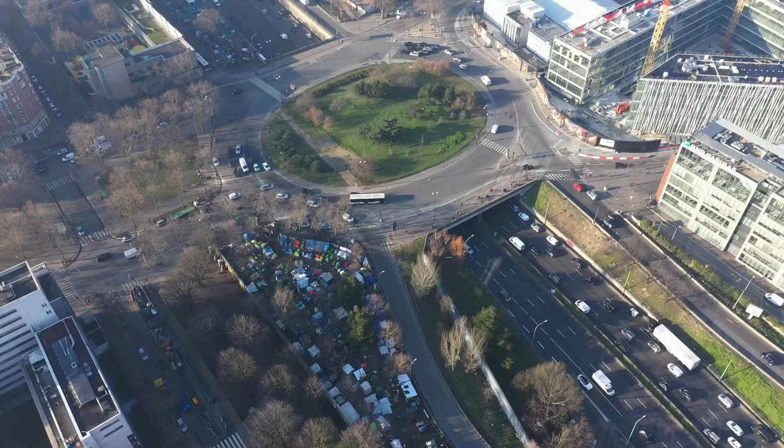Last video, we talked about the different types of greenhouse gases and their common sources, as well as how they contribute to global warming and climate change. In this video, we're going to delve deeper into the water sector's role, which we touched upon briefly last time.

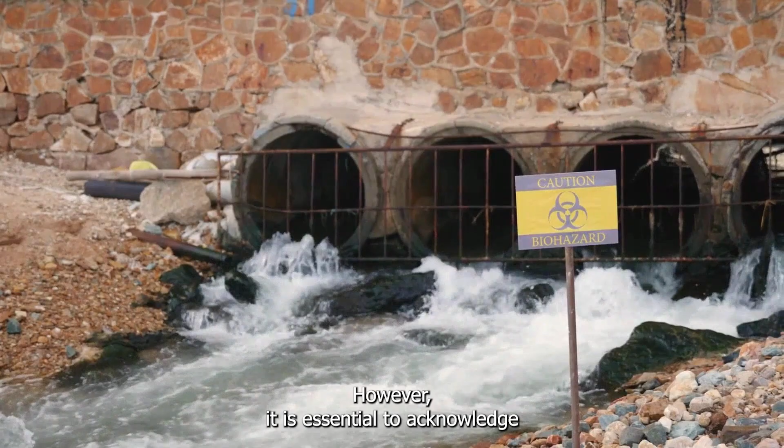The significance of the water sector's contributions to global warming can sometimes be underestimated. It tends to be lumped together with other industries, leading to misrepresentation, such as associating wastewater treatment plants with landfill emissions. However, it is essential to acknowledge that water-related processes, especially wastewater treatment facilities, constitute a distinct and noteworthy source of greenhouse gas emissions. In this discussion, we will begin by addressing the water sector in its entirety, but our subsequent focus will be primarily on wastewater treatment facilities.

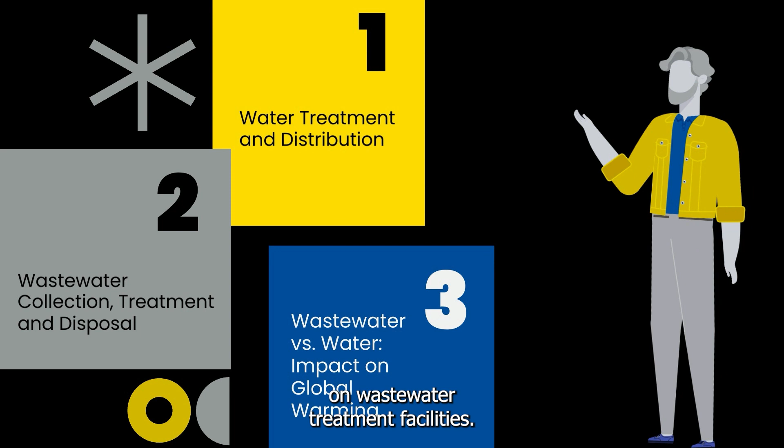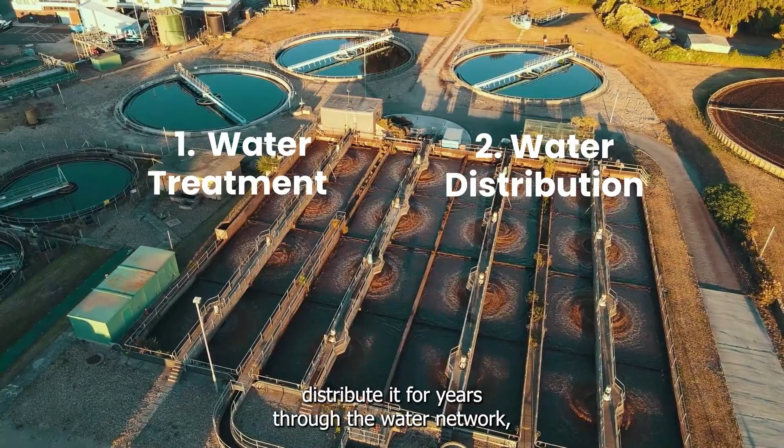Let's explore how the water sector functions. There are four main components. We first purify fresh water in water treatment plants, distribute it for use through the water network, collect the wastewater through the sewer network, and treat it before discharge at wastewater treatment plants. We'll focus on the first two parts first.

In Canada, we are privileged to have access to some of the world's largest renewable supplies of water. We have access to over 20% of the world's surface freshwater and 7% of the world's renewable water flow. Different municipalities source their freshwater based on environmental factors, like proximity to water bodies, rainfall patterns, and aquifer recharge rates.

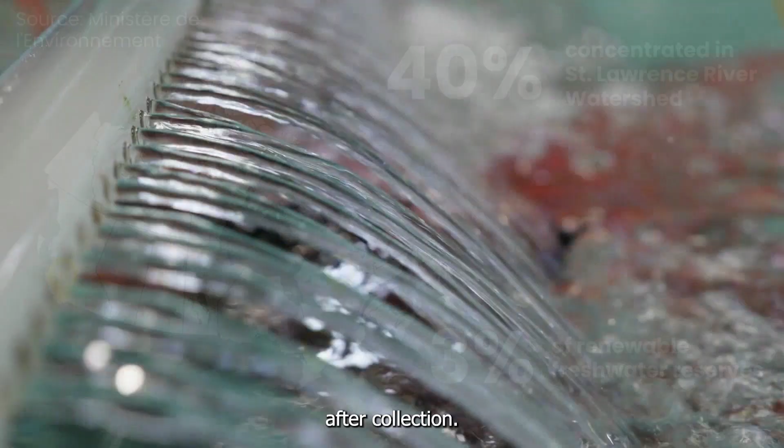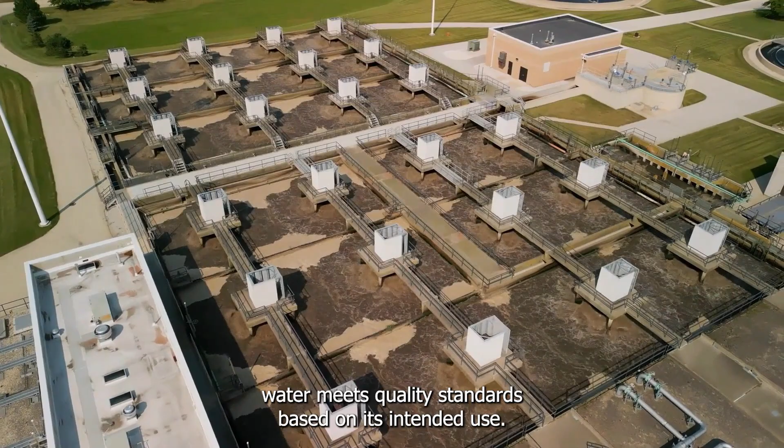After collection, fresh water is pumped to treatment plants for purification. Just because it's called freshwater doesn't mean it's actually clean yet. Various procedures such as coagulation, flocculation, sedimentation, and filtration ensure water meets quality standards based on its intended use.

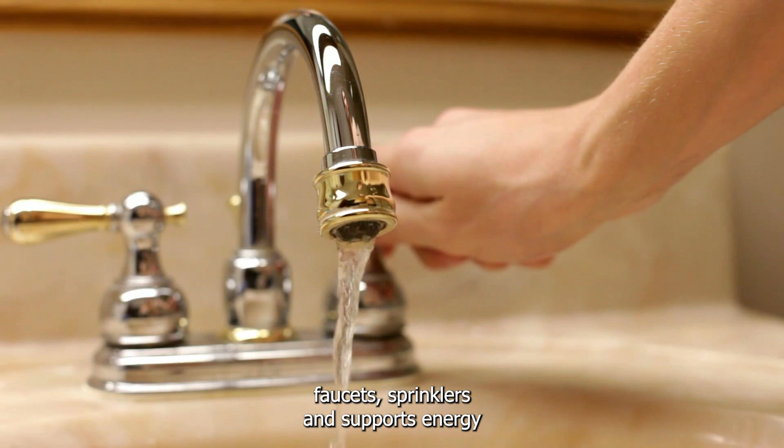The purified water is then stored in reservoirs and distributed through a network of pipes to consumers. That's where it reaches faucets, sprinklers, and supports energy generation in hydroelectric and thermal power plants. Toronto alone has 6,100 kilometers of pipes in its distribution system. That's greater than the distance between Toronto and Paris.

So, you might be wondering, where do greenhouse gases come from in this context? Remember our discussion regarding Scope 1, 2, and 3 emissions from the last video? Well, within the processes and systems of water facilities, here's how emissions are classified. Direct, or Scope 1 emissions, are released into the atmosphere as a direct result of the processes or activities owned or controlled by water corporations. An example of this is the water treatment process.

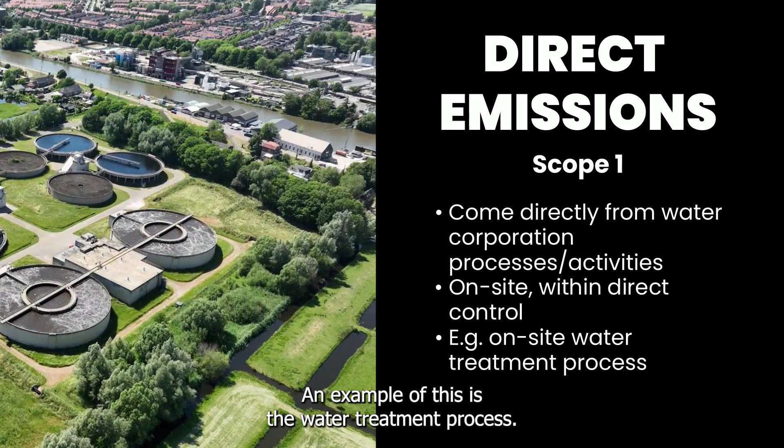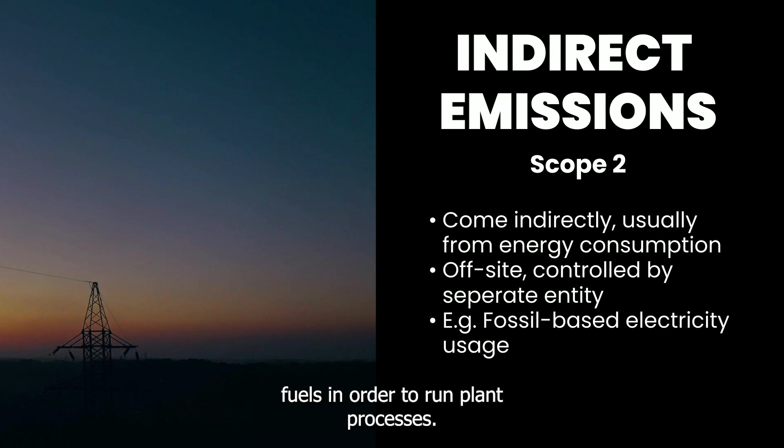Indirect, or Scope 2 emissions, are released off-site or by another entity due to actions or activities associated with water corporations. An example of this is the use of electricity generated from the burning of fossil fuels in order to run plant processes. While water corporations are not always required to report Scope 3 emissions, which come from indirect sources that are typically outside the direct control of water corporations, they're still important to consider. They can come from the production and transportation of chemicals and materials used in treatment, for instance.

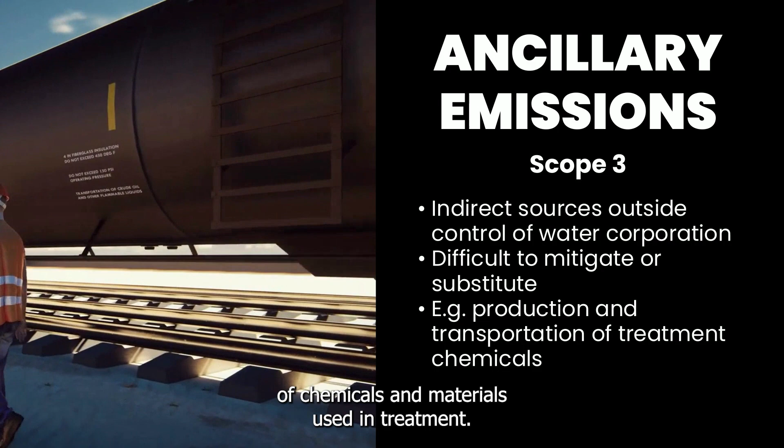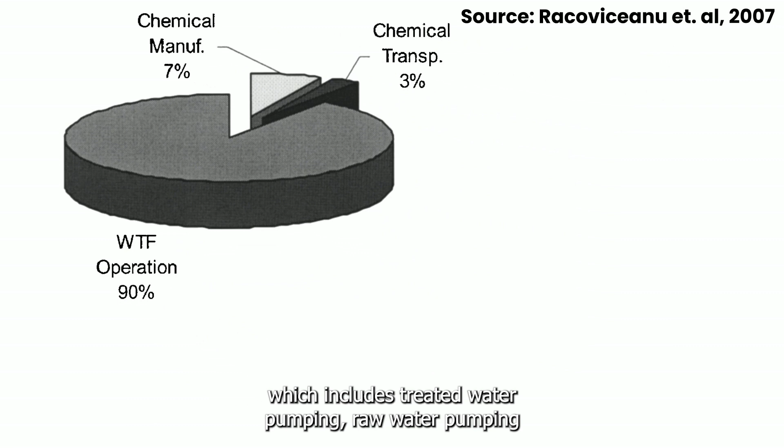Cumulatively, we can also call all of these life cycle emissions, since they contribute to the greenhouse gas profile of water facilities from the time that they are created and all throughout the time that they run. A study conducted by researchers at the University of Toronto in 2007 found that water treatment facility emissions for Canada totaled 66,796 tons, or around 0.07 megatons of carbon dioxide equivalent per year. 90% of this total came from process operations, which includes treated water pumping, raw water pumping, filtration, and backwash water pumping. The other 10% of emissions comes indirectly from chemical manufacturing and transportation.

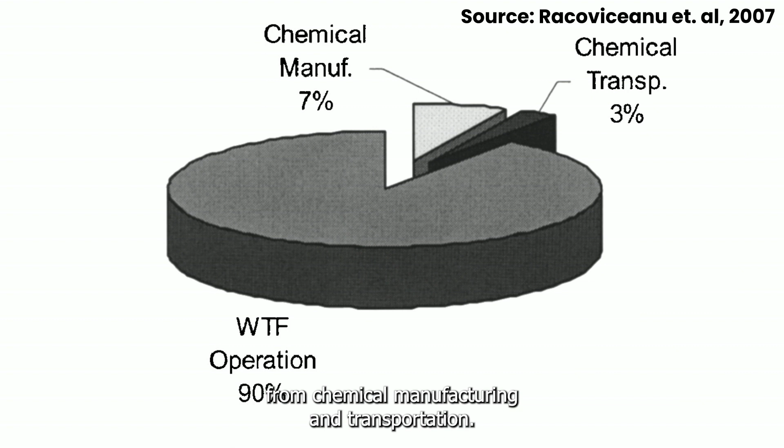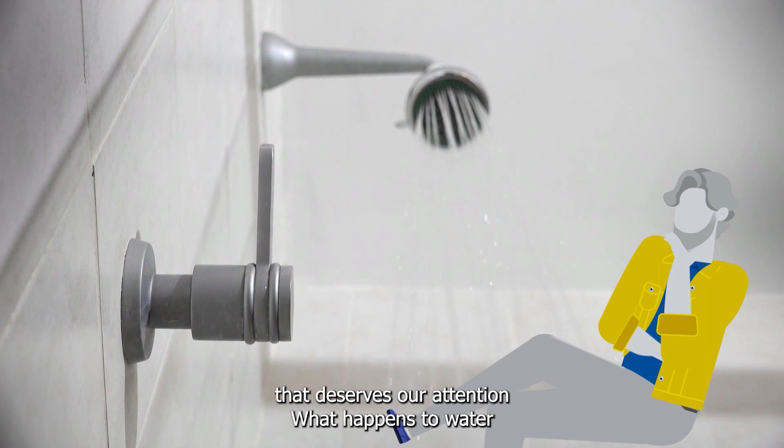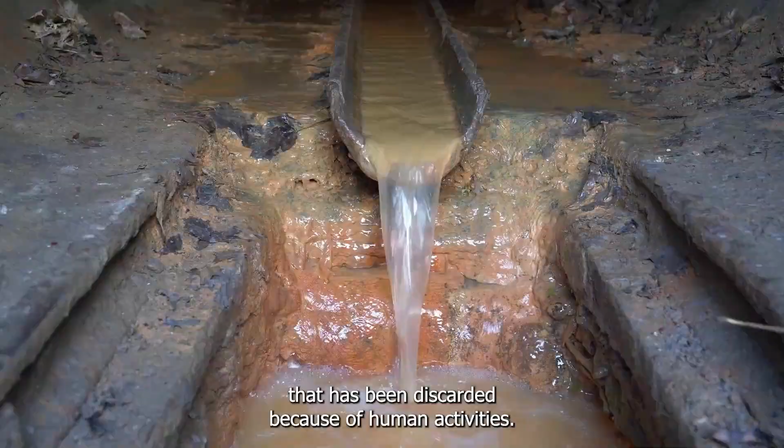When we think about water, we often focus on the water we drink or use in our daily activities like showering and flushing toilets. However, there's another crucial aspect that deserves our attention. What happens to water after we've used it? This is where a significant factor comes into play in the context of climate change. Wastewater. Wastewater refers to water that has been discarded because of human activities. It contains a diverse range of contaminants and can pose risks to the environment and human health if not properly treated before being discharged or reused.

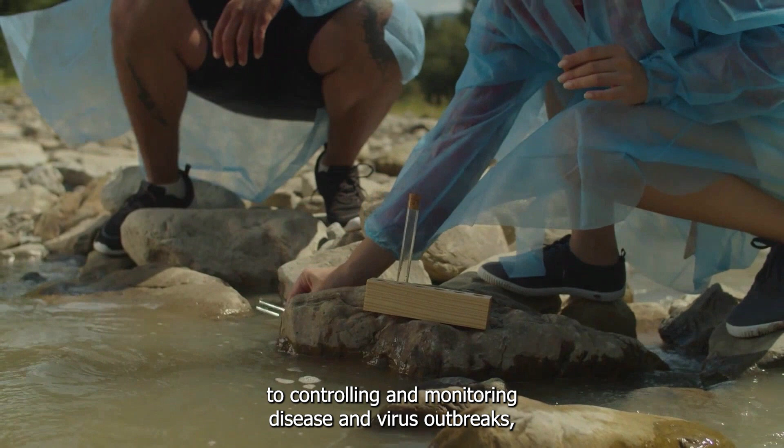Wastewater treatment has been crucial to controlling and monitoring disease and virus outbreaks, especially in the last 5 years. One notable example is coronavirus, which has regularly been detected in wastewater samples. Monitoring wastewater can help provide valuable insights into the progression of pandemics.

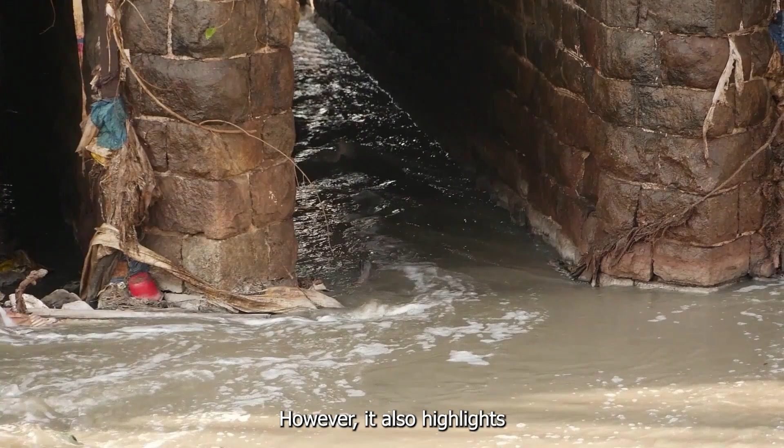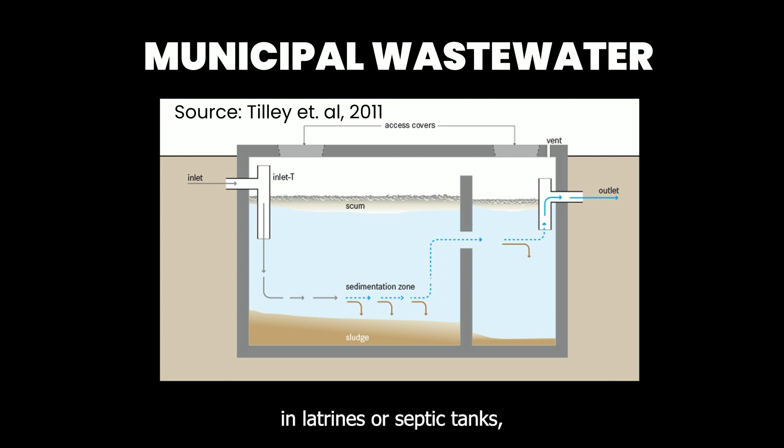However, it also highlights the potential risk of secondary transmission of viruses through waterborne and wastewater routes if proper sanitization measures are not implemented. Let's break down what exactly happens to municipal wastewater, which is a collection of household, commercial, and non-hazardous industrial wastewater. If left untreated, wastewater finds its way into rivers, lakes, estuaries, and seas. To prevent this, wastewater is either treated on-site in latrines or septic tanks, or it is collected and transported through sewers to a centralized treatment plant.

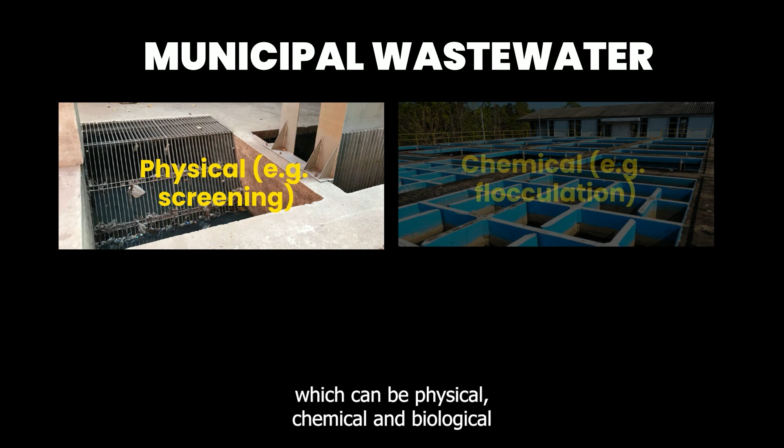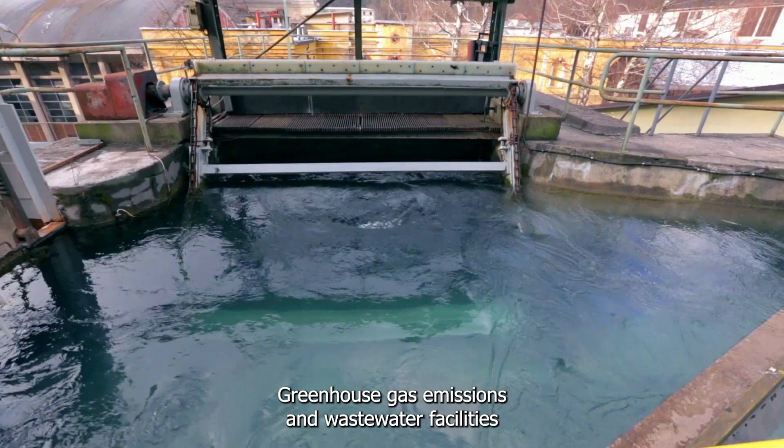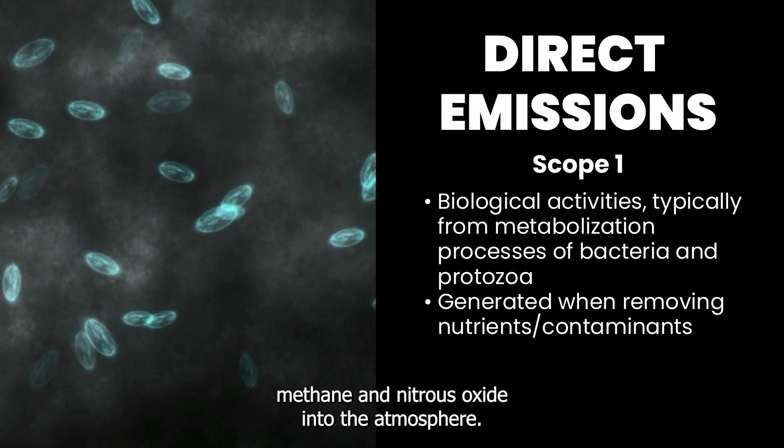Once at the treatment plant, it undergoes a series of processes, which can be physical, chemical, and biological, and have energy-intensive expenditures, as well as greenhouse gas emission profiles. Similar to water treatment facilities, greenhouse gas emissions in wastewater facilities can be both direct and indirect. Scope 1 emissions originate from biological activity in processes that treat wastewater, which directly release carbon dioxide, methane, and nitrous oxide into the atmosphere. Unclean water contains bacteria that metabolizes organic materials and contaminants and converts it into greenhouse gases.

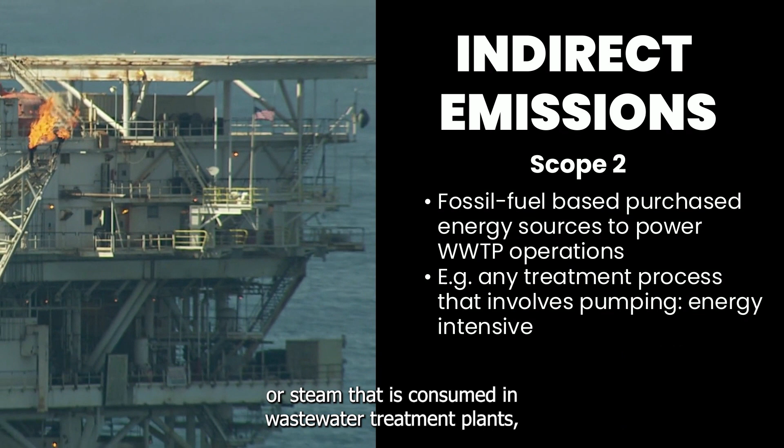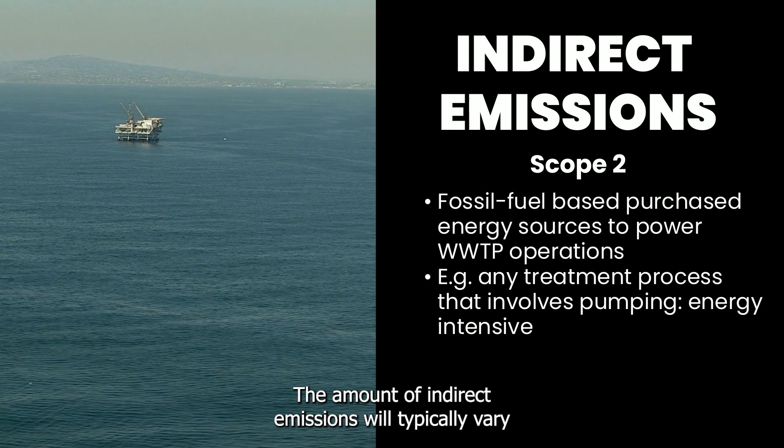Scope 2 emissions come indirectly from the generation of fossil fuel-based purchased electricity, heat, or steam that is consumed in wastewater treatment plants, owned or controlled equipment in operations. For instance, energy usage for pumping during transmission, aeration, and mixing processes qualify as Scope 2 emissions. The amount of indirect emissions will typically vary based on the precise energy source and the size of the facility. Finally, Scope 3 emissions arise indirectly from materials and consumables used for the treatment of wastewater, like the manufacturing and transportation of chemicals used in the treatment processes.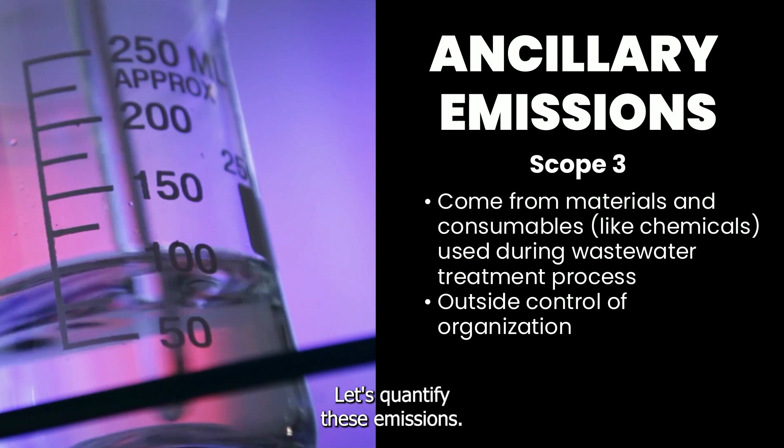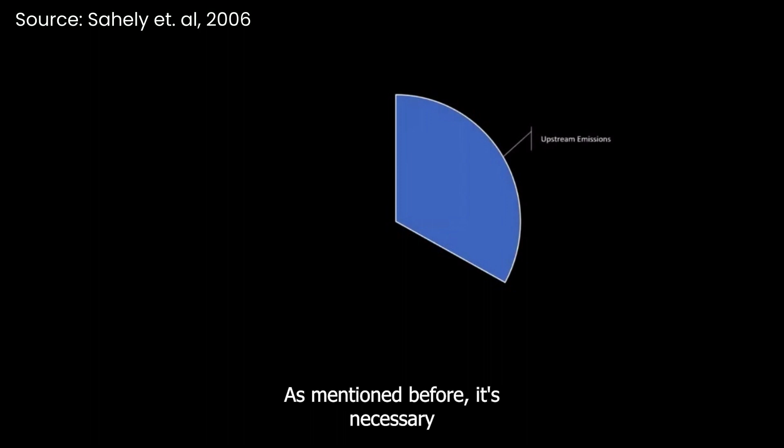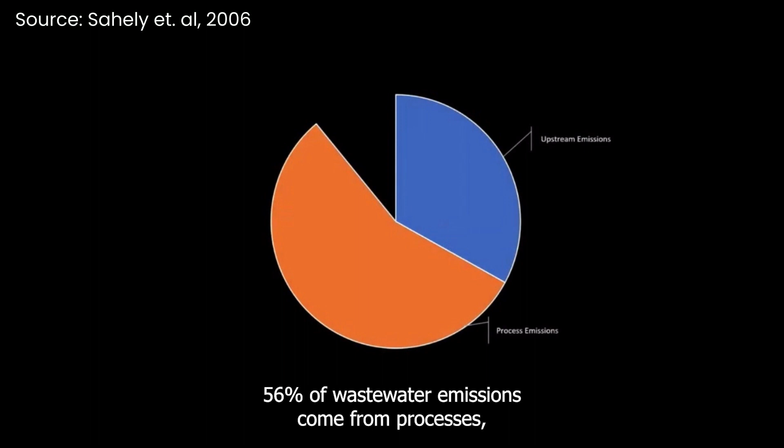Let's quantify these emissions. In 2006, a study conducted by researchers at the University of Toronto calculated that the total carbon dioxide equivalent emissions from the municipal wastewater sector across Canada for that year were approximately 1.05 megatons. 33% of this total can be attributed to upstream emissions, which come from off-site production and transmission of fuels that are used on plants. As mentioned before, it's necessary to consider these emissions as fundamentally a part of the wastewater sector when employing the life cycle approach. 56% of wastewater emissions come from processes, essentially the direct sources discussed previously. The remaining 11% of emissions come from facility heat, which is on-site fuel used for heating and electricity.

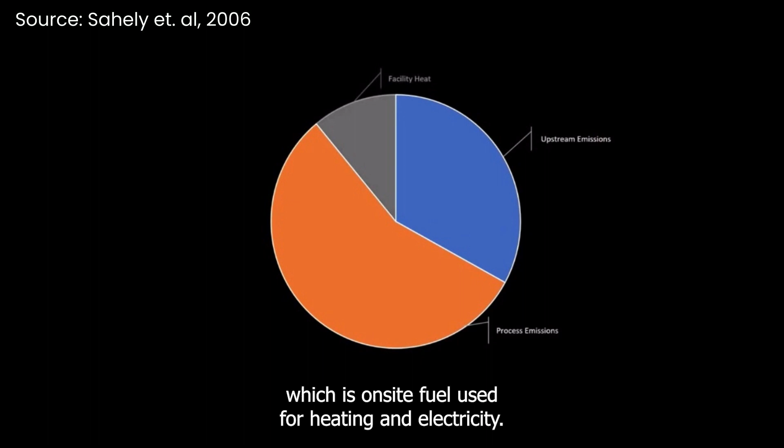However, this emissions profile of 1.05 megatons is only the tip of the iceberg. This number was projected to increase over the next 20 years, and it has, significantly. A study conducted in February of this year that performed emissions measurements at 63 wastewater treatment plants in the United States found that they emit over 5.3 megatons of carbon dioxide equivalent, 5 times greater than the aforementioned study reported. For a government-reported figure, the EPA finds that as of 2019, total greenhouse gas emissions from the wastewater sector amount to 44.8 megatons of carbon dioxide equivalent. Similar trends are likely applicable to wastewater treatment plants in Canada as well, and thus we must remain vigilant.

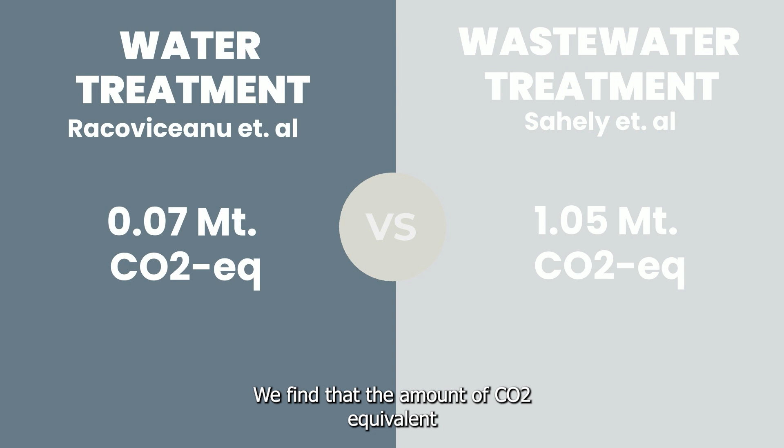Now that we understand the processes and greenhouse gas contributions of freshwater and wastewater treatment facilities, an important question arises: which has the greater impact? Going back to the 2 Canadian studies we looked at, we find that the amount of CO2 equivalent emissions per year for wastewater utilities is 15 times greater than that of water utilities. Let's put things into perspective. Each liter of gasoline burned while driving your car releases approximately 2.3 kilograms of carbon dioxide equivalent.

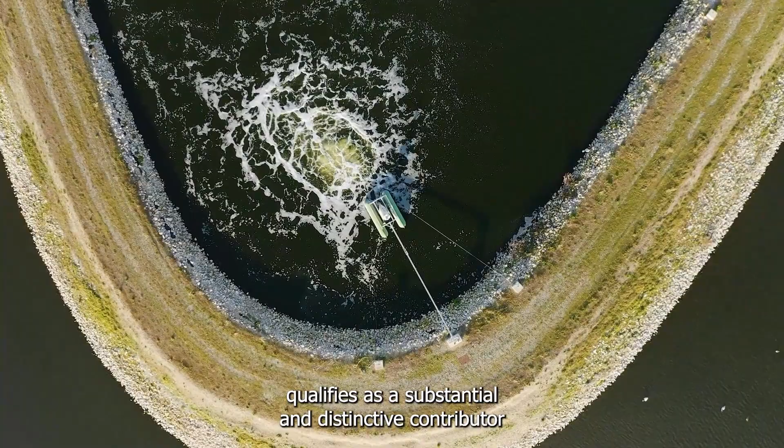In conclusion, it is evident that the water sector, with a specific focus on wastewater treatment, qualifies as a substantial and distinctive contributor to greenhouse gas emissions in Canada. Throughout this video, we have gained an understanding of the operations of freshwater and wastewater utilities, identified the sources of both direct and indirect emissions within these systems, and quantified their annual greenhouse gas emissions. It is crucial that we recognize the significant role of the water sector in contributing to the overall greenhouse gas emissions and take proactive steps to minimize its environmental footprint. Together, we can work towards a greener and more environmentally responsible water sector in Canada and beyond.